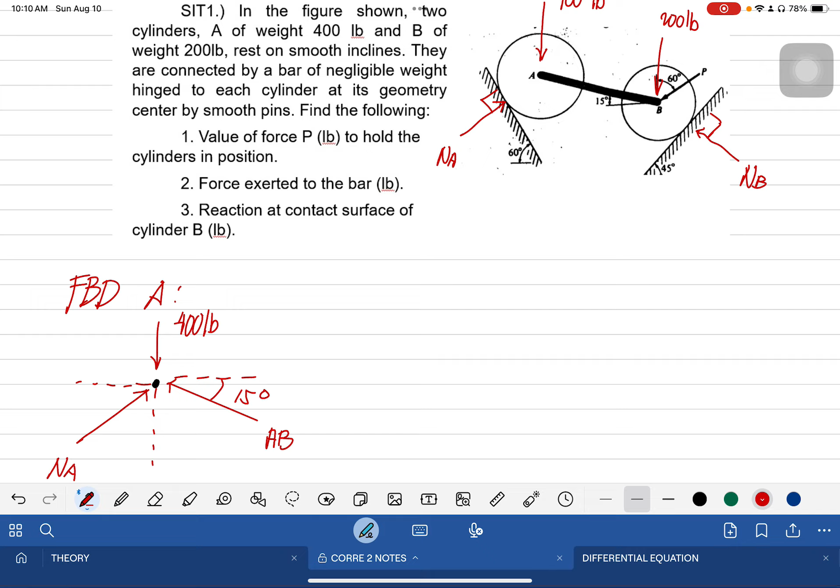Summation of forces equal to 0. Summation of forces x equal to 0. Positive to the right, we have NA sine 60 minus AB cosine 15 equal to 0. And this is our first equation. Next, summation of forces y equal to 0. Positive upward, we have NA cosine 60 plus AB sine 15 minus 400 equal to 0.

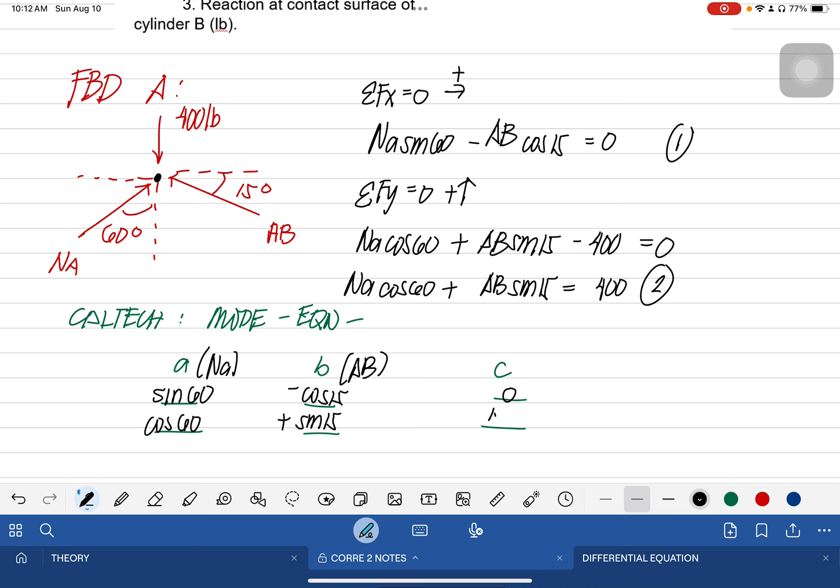Ganito po. So, first equation, yung unang layer natin, this will be sine 60. Then si B, this will be cosine 15. And yung C natin, that will be 0. Next, we will have cosine 60 plus sine 15 equal to 400. Take note, our A is our NA and B is our AB. Cosine 60, sine 15, and 400.

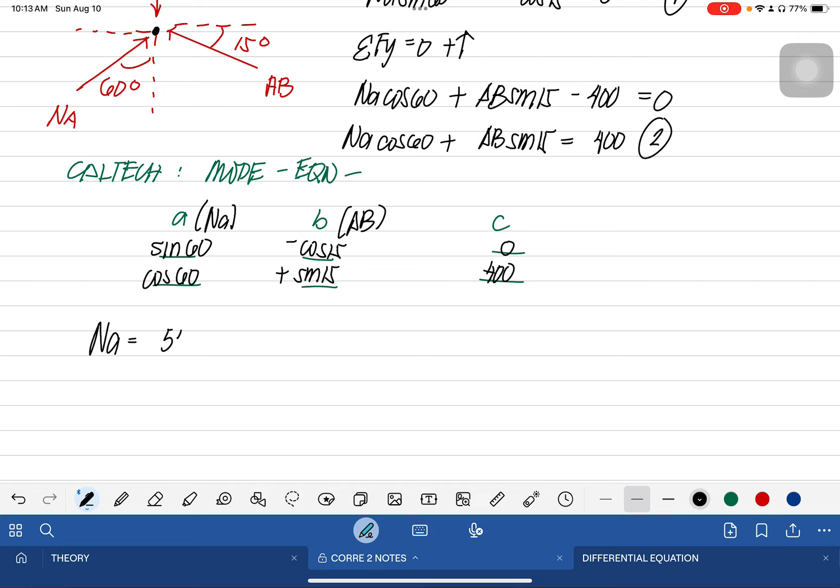So NA po is equal to 546.410. Okay, so ano bang unit po natin? Pounds. Then, si AB po, the force exerted dun sa ating bar, that is equal to 489.898 pounds. So ito po ay isa sa mga sagot na natin. Kasi tanong, what is the force exerted dun sa ating bar?

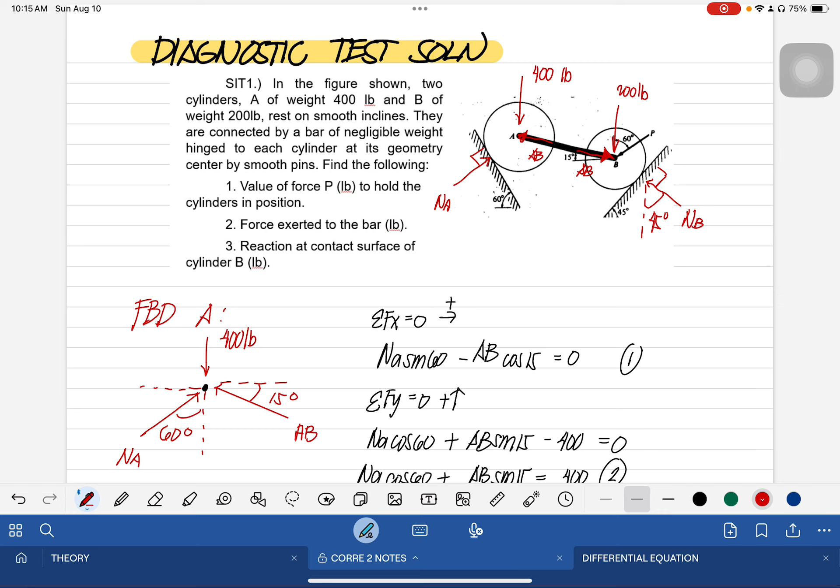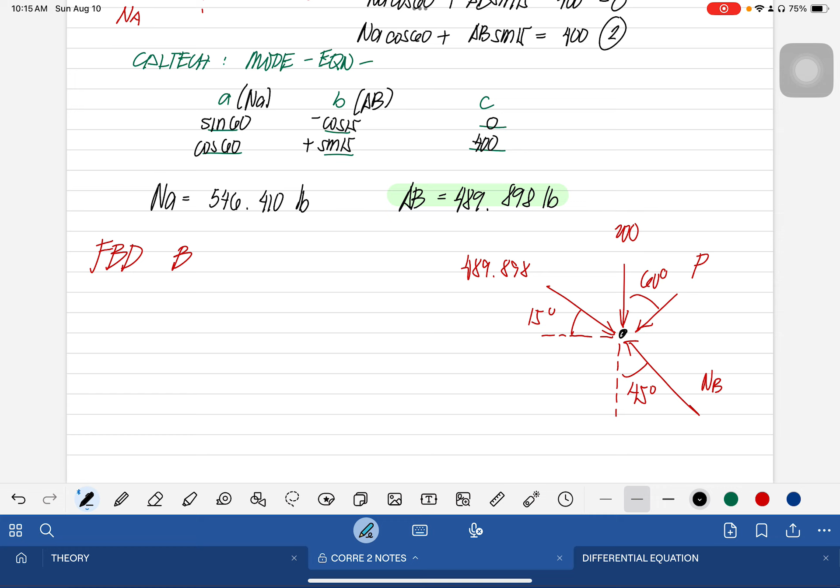Using the equations of equilibrium, summation of forces y equal to 0. If y is positive, we have negative 200 minus 489.898 sine 15 minus P cosine 60 plus NB cosine 45 equal to 0. So transpose sa kanan lahat ng constant term. Iwan natin yung mga variables. We will have negative P cosine 60 plus NB cosine 45 equal to 326.795. So this is our first equation.

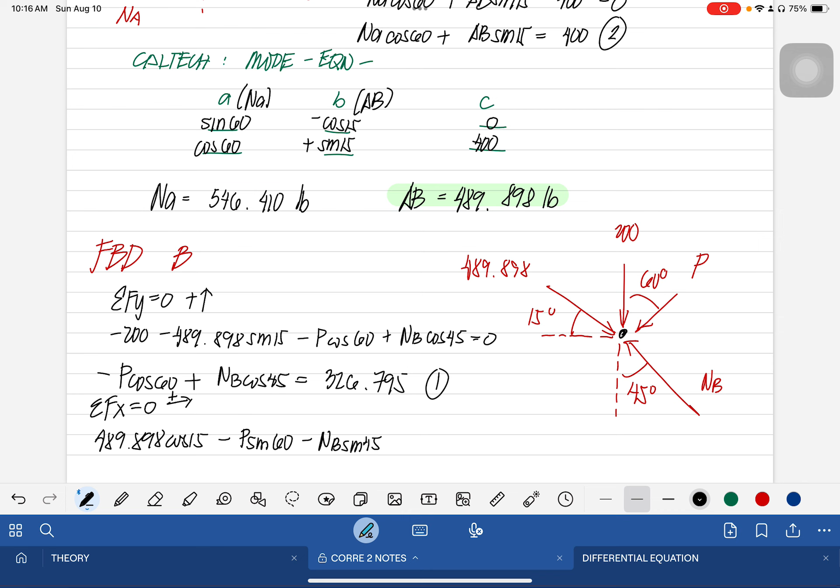Next, summation tayo ng forces x equal to 0. Positive to the right, we have 489.898 cosine 15 minus P sine 60 minus NB sine 45 degrees. Okay, so wala nang to the right, wala nang horizontal. So this is equal to 0.

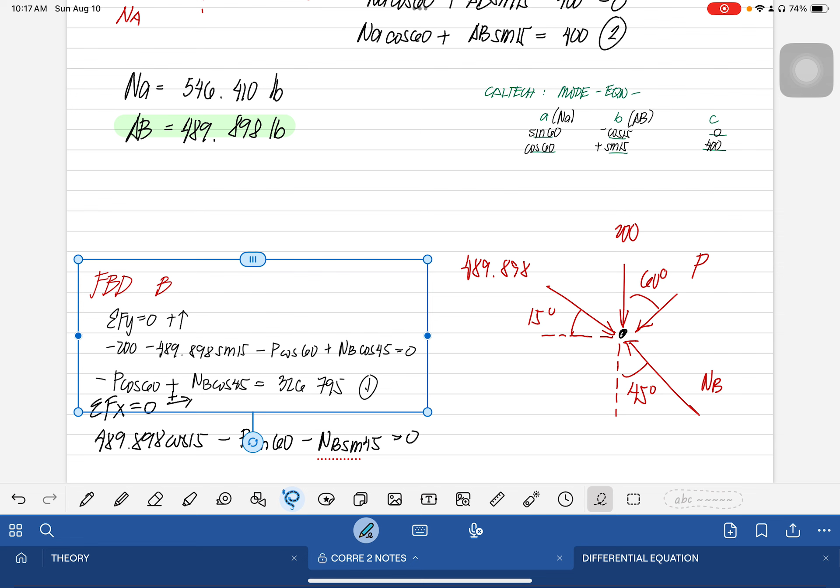We will have negative P sine 60 minus NB sine 45. This equal to negative 473.205. So since both sides of our equation merong negative sign, pwede na itong P sine 60 plus NB sine 45 degrees equal to 473.205. Okay, so ano nangyari? Kinancel po yung negative sign both sides of our equation.

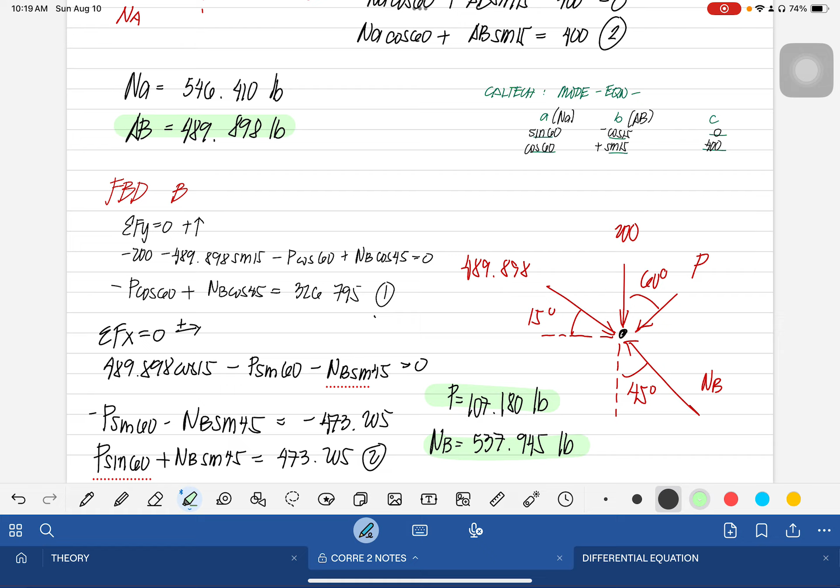So using two equations two unknowns, we will have negative P cosine 60 plus cosine 45 degrees, 326.795. And the other one is sine 60, sine 45, 473.205. And this is equal to P equal to 107.180 pounds. And the other one, the normal force between cylinder B and the surface, is equal to 537.945. Okay, so this is our answers para sa situation 1.